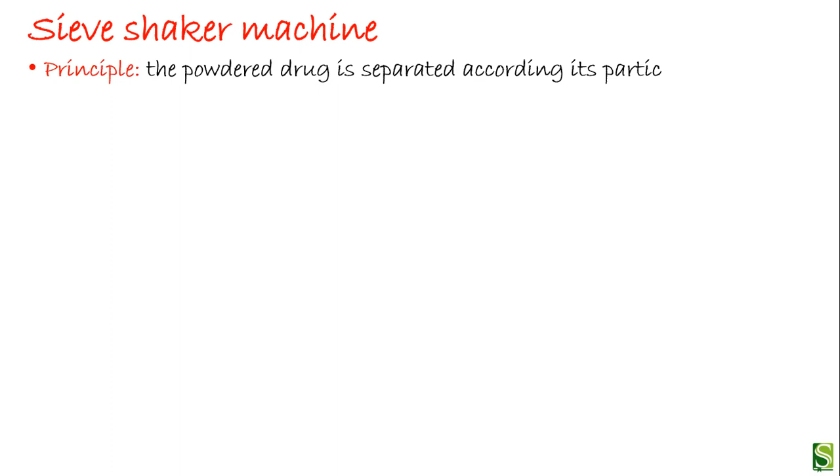Now, first, let's see what is a sieve shaker machine. The sieve shaker works basically on the principle of size separation based on the size of the particle. So we can say the powdered drug is separated according to its particle size using a number of sieves in a nest, which are then agitated for a rapid size separation.

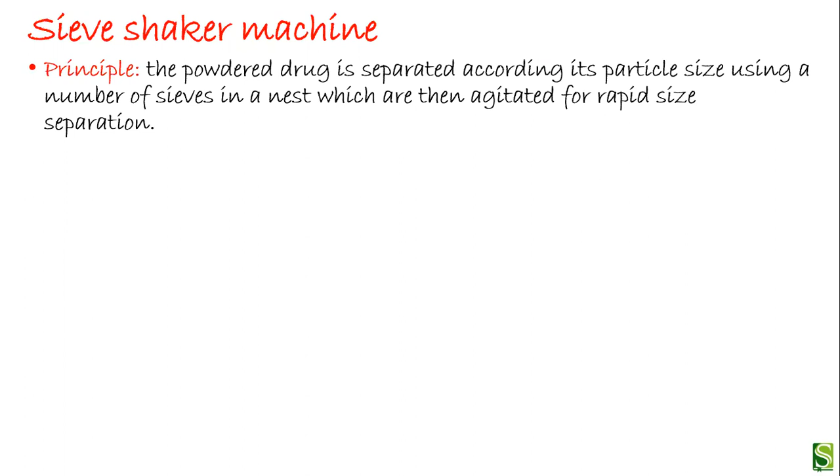Let us see the construction. Standard sieves of different mesh numbers are fixed in a mechanical shaker apparatus with the coarsest sieve at the top and the finest sieve at the bottom. First we will see the working, then we will see its diagram. The powder sample of 50 gram is placed on the top sieve, that is on the coarsest sieve.

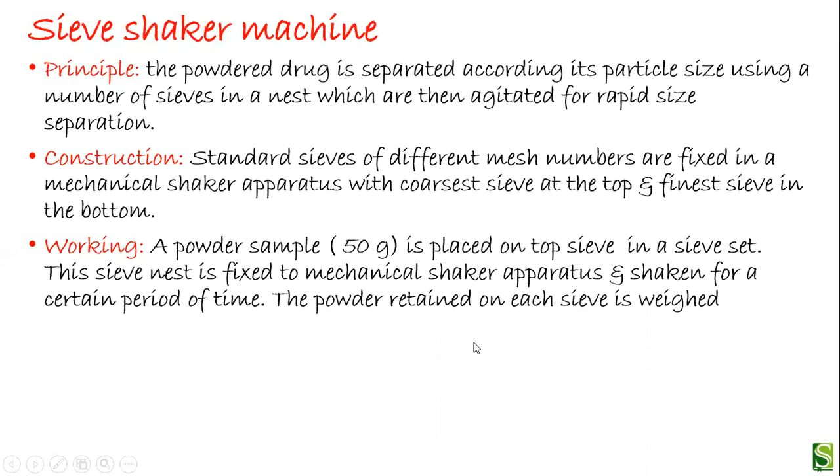So this sieve nest is then fixed to a mechanical shaker apparatus and shaken for a certain period of time, and the powder retained on each sieve is then weighed after the equipment has stopped shaking. Okay, so now this is a sieve shaker. This is the lid of the sieve shaker. These are the sieves of different sizes.

Now what we have to keep in mind: the coarsest sieve means the sieve which has the least sieve number. That is kept here on the top, and the sieve which has the highest sieve number is kept below. So a small sieve number represents coarseness, and a large sieve number expresses fineness.

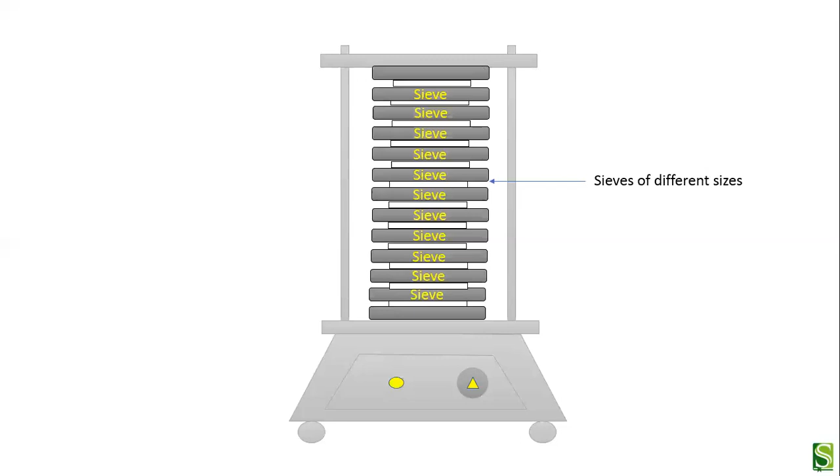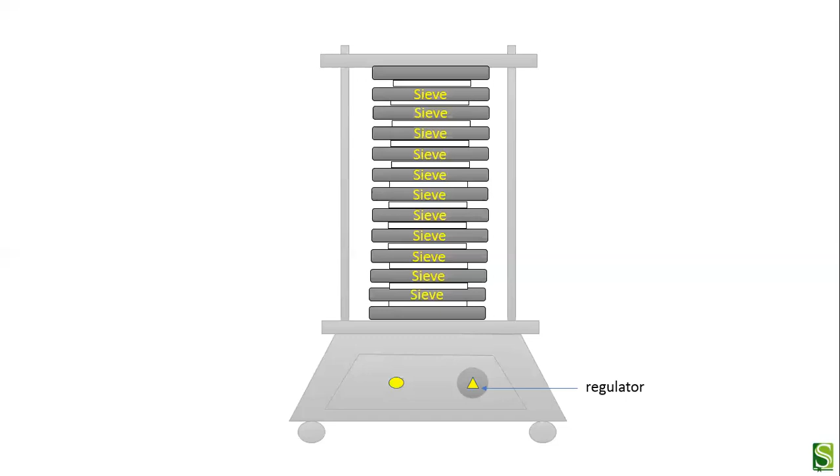Suppose we have placed sieve number 10 here, then we will place sieve number 12, and then sieve number 22, 44, 60, 80, 85, 100, 125. In this way we have to arrange these sieves. This is the receiving pan, this is the indicator bulb, and this is the regulator. You can fix the time for which you want to shake the equipment.

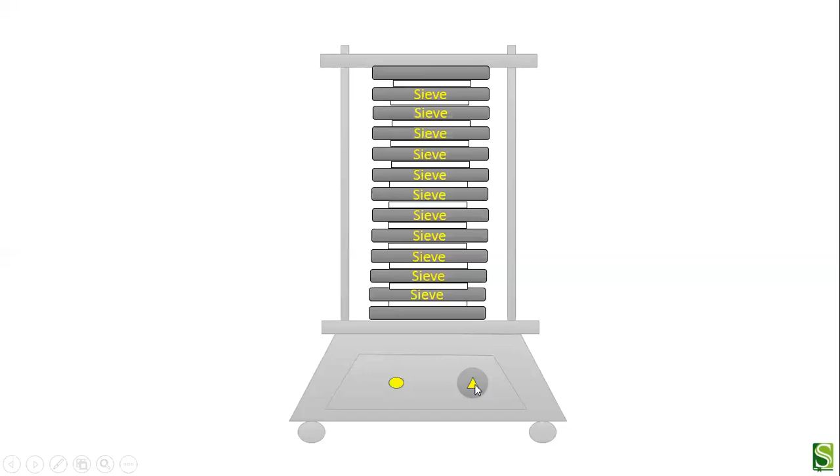Now what happens when you switch it on? First you will arrange this assembly, then you are going to pour 50 grams of the powder on the top sieve, and then you will place this lid. You will fix this lid, set the time period here, and start the equipment. Now this machine will start to agitate,

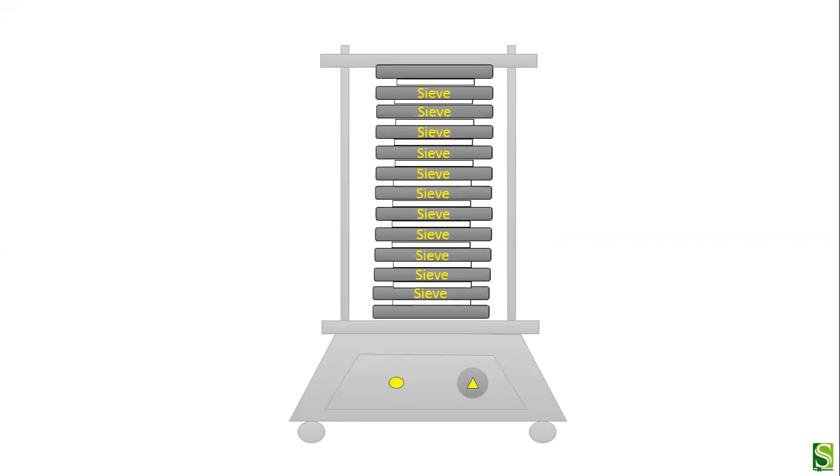or we can say it will start to shake. After the time is over, it will stop, and then we will take out this lid, and one by one we will take out the sieves. After taking out the sieves, we will weigh how much of the material is retained on each sieve, and then we calculate the percent of the weight retained. In this way we get the size distribution.

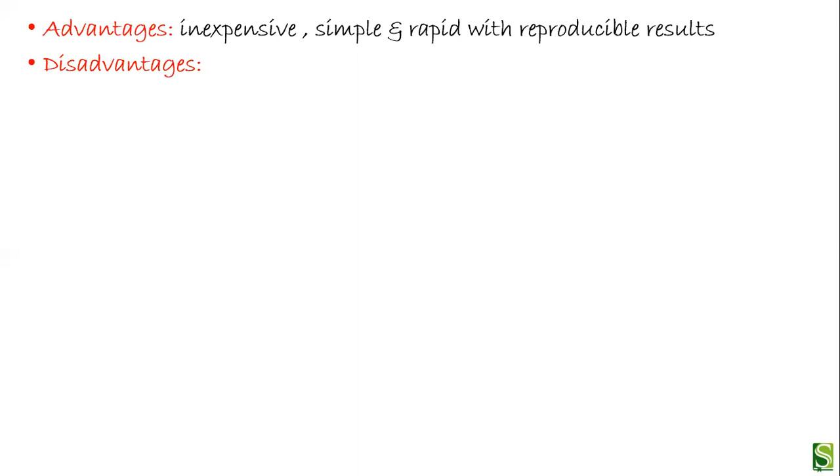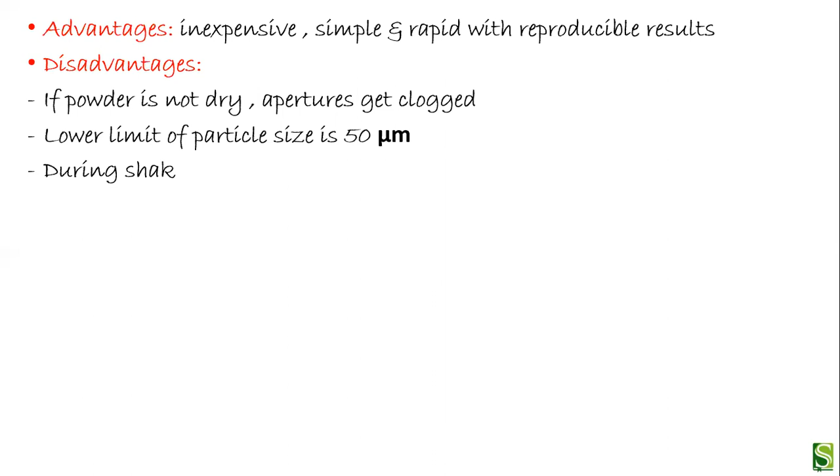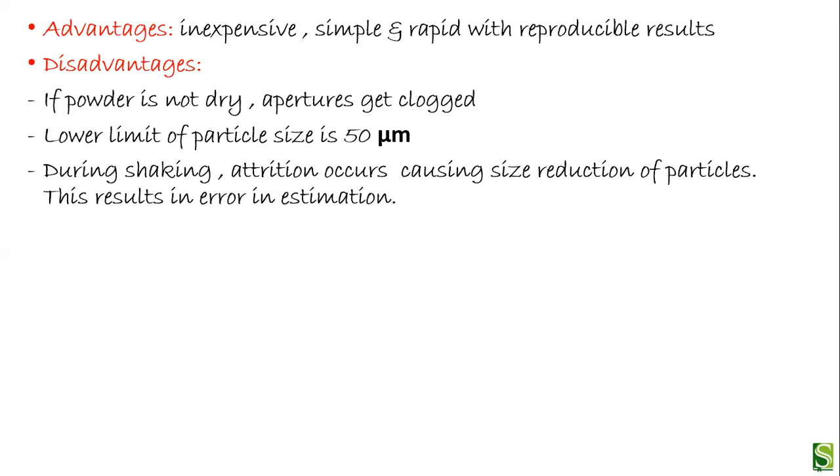The advantage of this equipment is that it is very inexpensive, simple, and rapid with reproducible results. The disadvantage is that if the powder is not dry, the apertures get clogged. It has a lower particle size limit of 50 micrometers. Also, during shaking, attrition occurs, which results in size reduction of the particles, and this results in errors in the estimation. The variant of the sieve shaker is the electromagnetic sieve shaker.

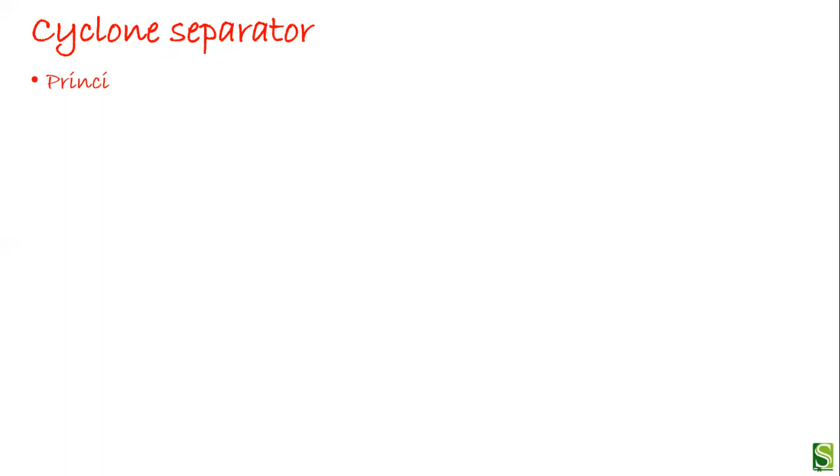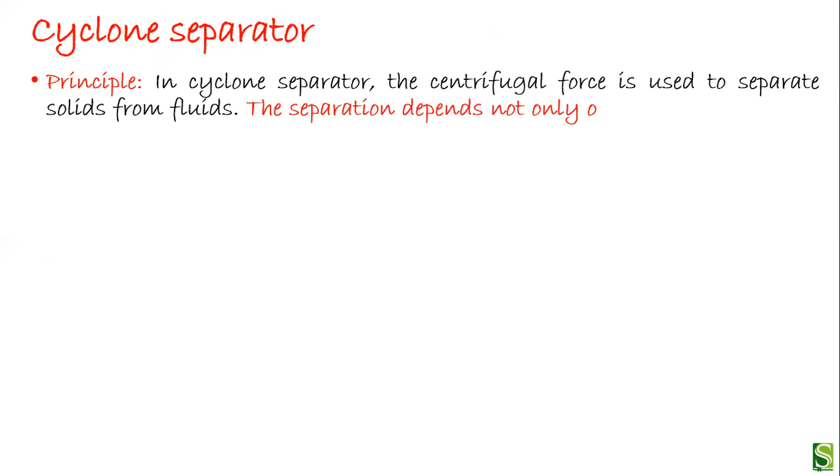Now next we are going to see the cyclone separator. The principle is that in a cyclone separator, centrifugal force is used to separate the solids from the fluids. The separation depends not only on the particle size, but also on the density of the particle. The higher the density, the more its settling rate.

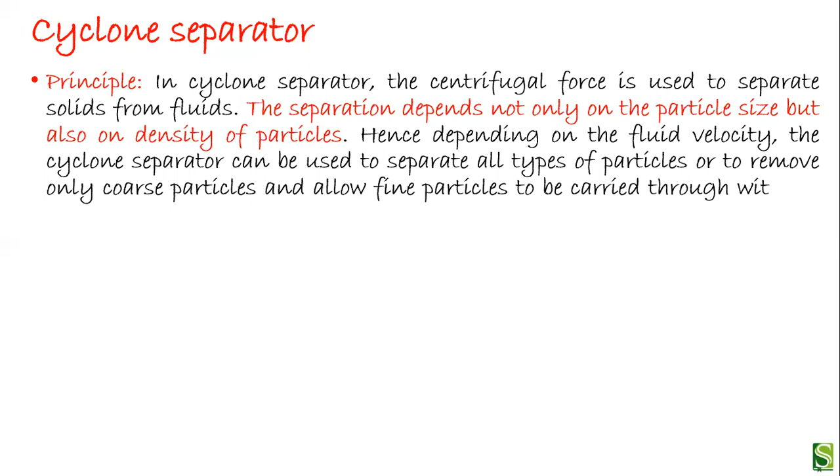Depending on the fluid velocity, the cyclone separator can be used to separate all types of particles, or to remove only coarse particles and allow fine particles to be carried through the equipment with the fluid. Basically the cyclone separator consists of a cylindrical vessel with a conical base at its lower part.

The upper part of the vessel is fitted with a tangential inlet and a fluid outlet. The fluid outlet is on the upper side. Now which fluid are we going to use? We are going to use a gas. This extends inwardly into the separator, and at the base it is fitted with a solid outlet.

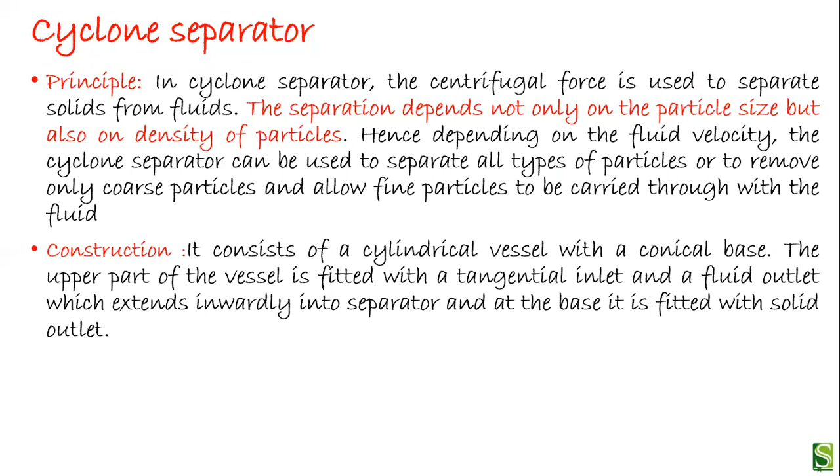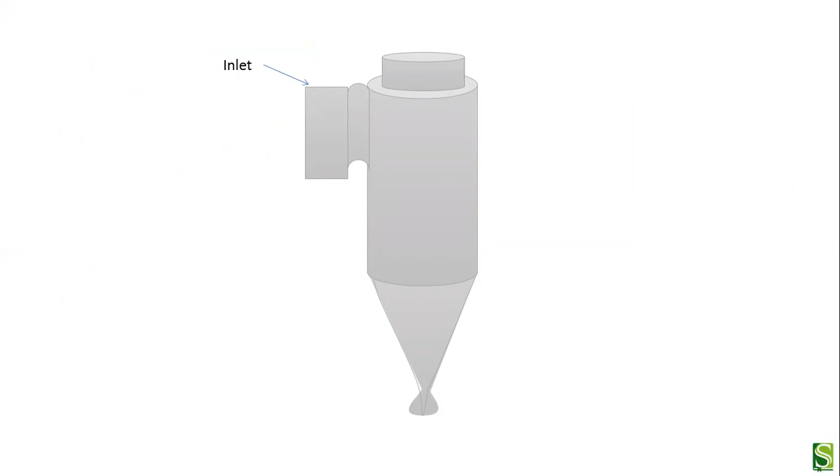Now this is the actual construction of the cyclone separator. This is the inlet. Inlet for what? Inlet for gas along with the powder particles. So it has got a tangential inlet. After that inlet, this is the gas outlet tube.

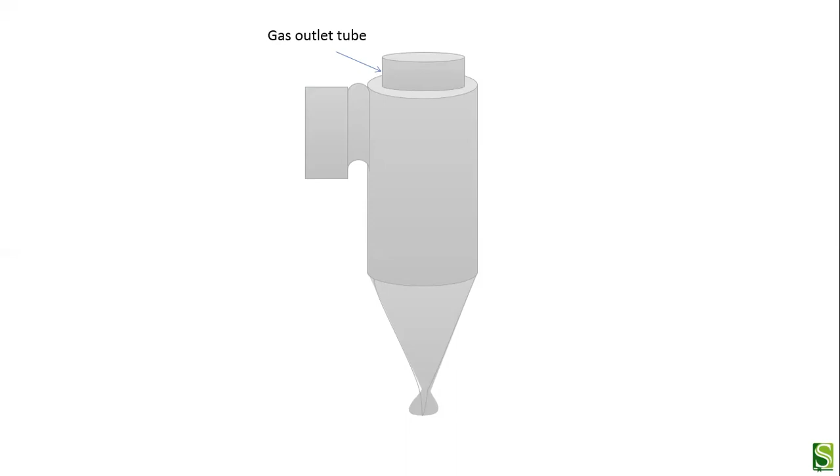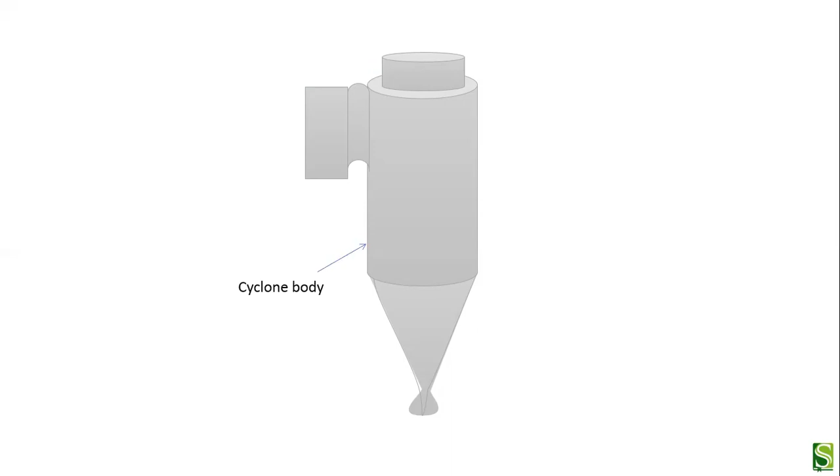The gas comes out through this outlet, or the gas along with very fine particles comes out. Okay, then this is the outlet for clean air. Then this is for dirty air, and this is the cyclone body, and this is the conical section of the body, and this is the outlet.

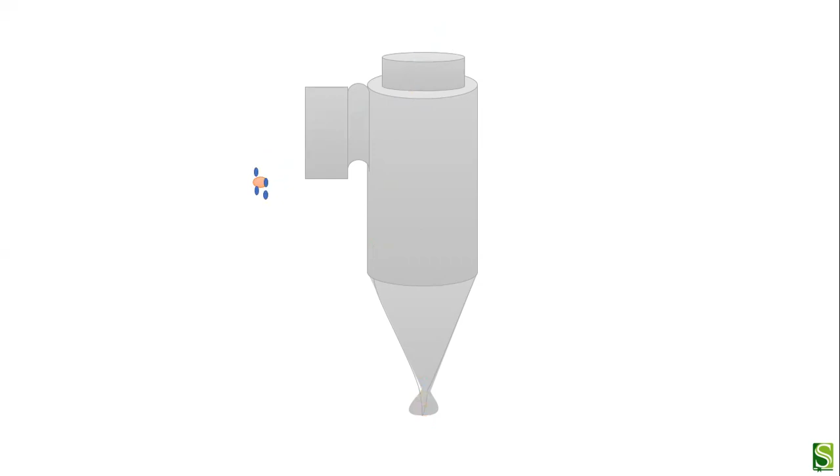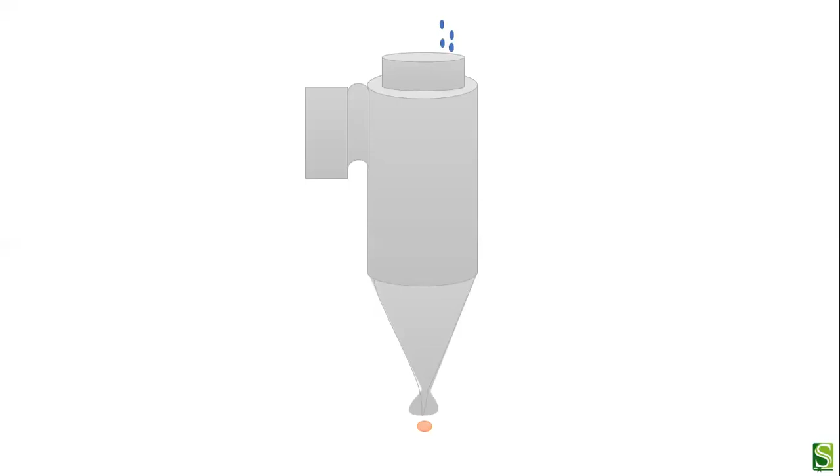Okay, so when you feed the cyclone separator with a very high velocity of gas which contains the powders, when it moves inside, what happens? The fine powders can be carried with the fluid, but the coarse particles experience centrifugal force, and due to centrifugal force, they move over a circular path, and then come out through the outlet. So in this way we have achieved the separation of fine and coarse particles.

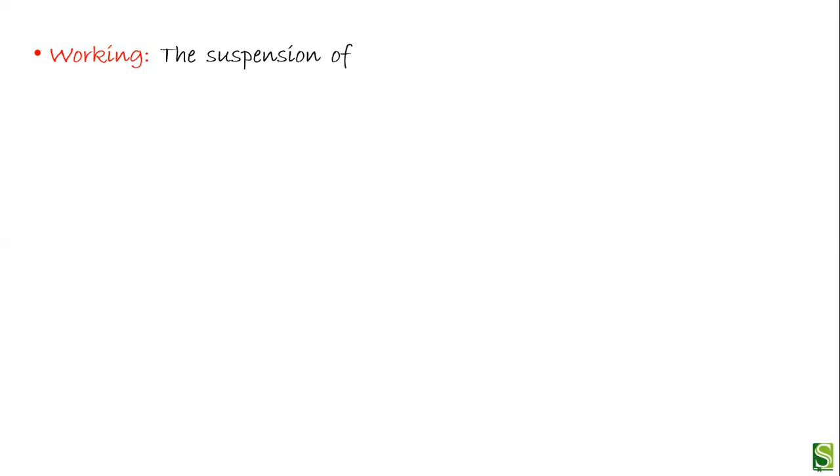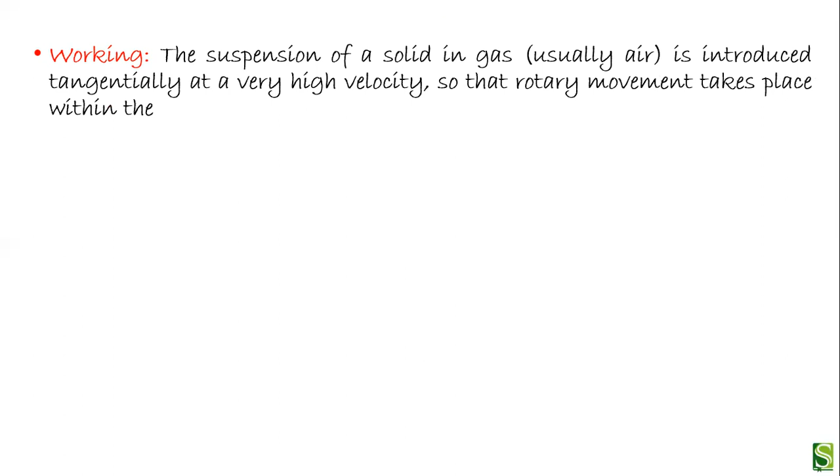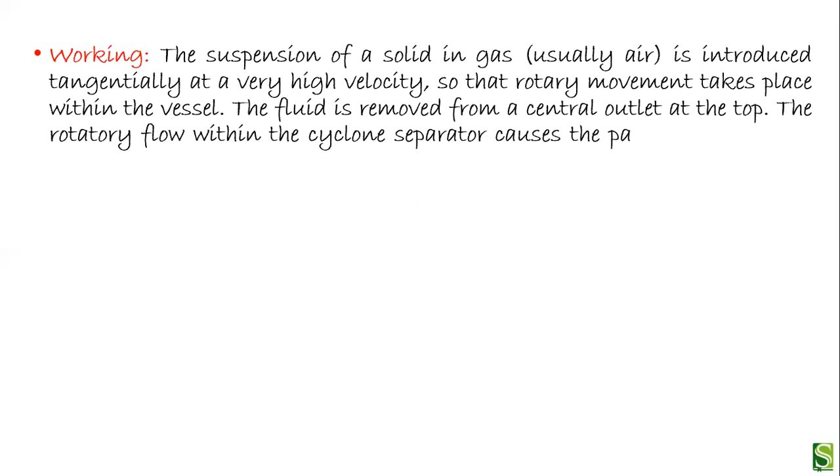So the working can be described as: when you introduce the solid in the gas tangentially at a very high velocity, the particle gets rotary movement within the vessel, and the fluid is removed from the central outlet provided at the top, and the rotary flow within the cyclone separator causes the particles to be acted on by the centrifugal force. Due to the action of the centrifugal force, the solids are thrown out to the walls, and thereafter fall to the conical base, and then are discharged through the solid outlet.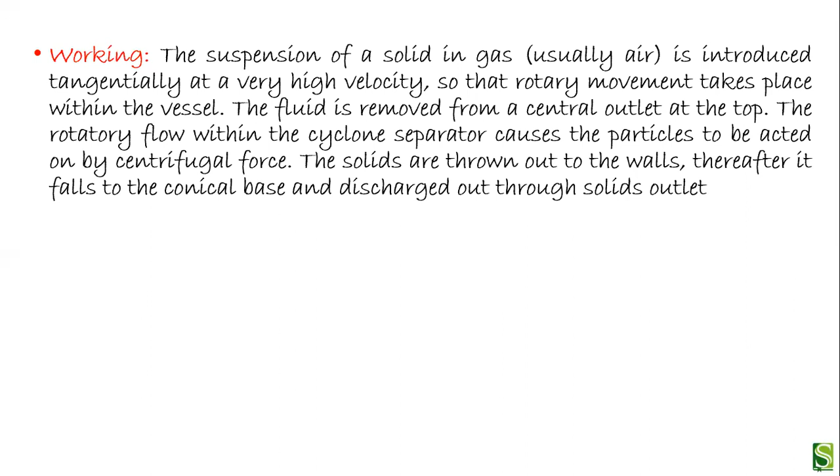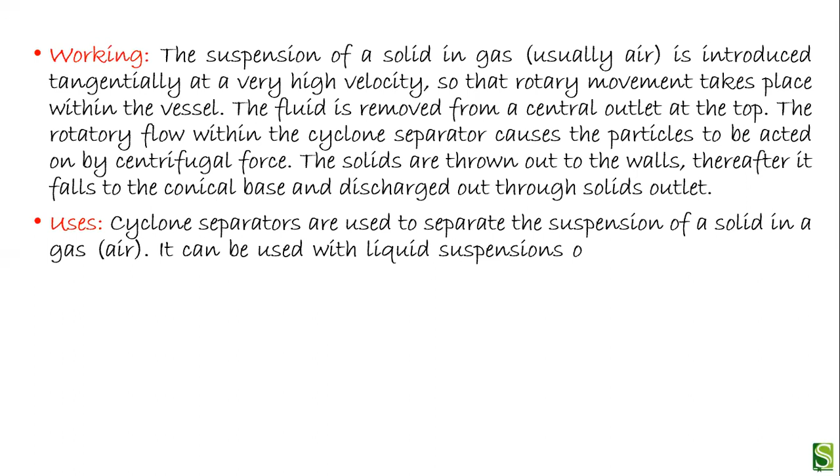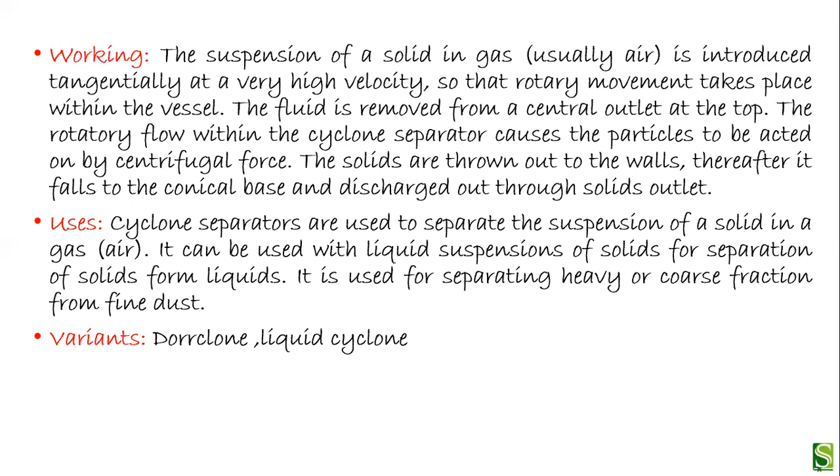Now cyclone separators are mostly used for separation of suspension of a solid in a gas or air. It can be used with liquid suspensions of solids for separation of the solids from liquids. It is also used for separating heavy or coarse fraction from fine dust. The variants of cyclone separator include Dorrclone and liquid cyclone.

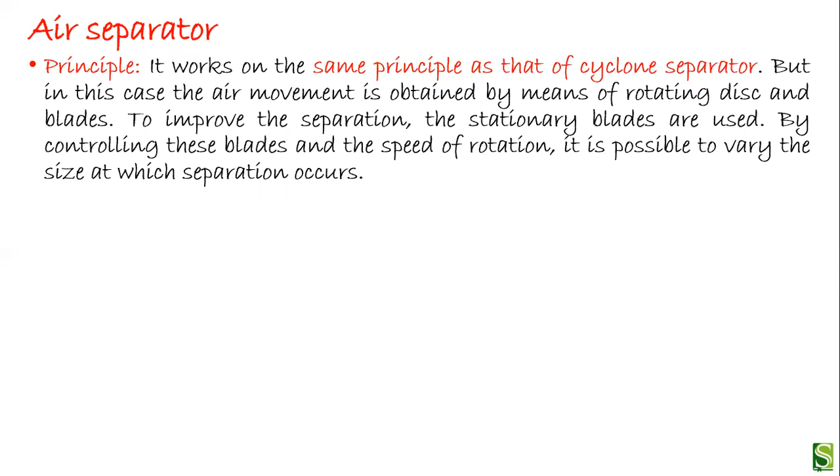Now we will see air separator. It works on the same principle as the cyclone separator, but in this case, the air movement is obtained by means of rotating disc and blades. To improve the separation, stationary blades are used. So by controlling these blades and the speed of rotation, it is possible to vary the size at which separation will occur.

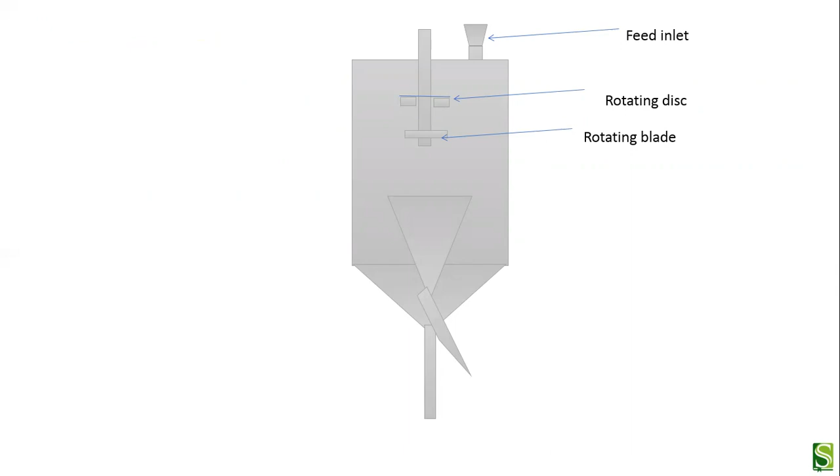Now this is your air separator. This is the feed inlet. This is the rotating disc. This is the rotating blade. Sometimes this blade can be made stationary. So depending on the rotation of the blade, or if it is stationary, we can achieve separation of different sizes. This is the outlet for heavy particles. This is the outlet for fine particles.

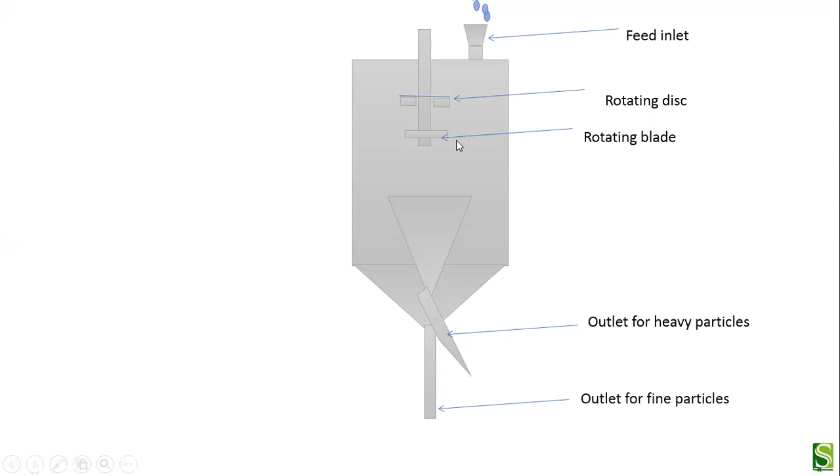Now when you feed this air separator with the particles, what happens? Due to the rotation of the disc, high air currents are produced within this equipment, and the heavy particles do not move along with that current of air, and hence they immediately settle and are taken out from this outlet. Whereas the fine particles get moved along with the air current generated by rotation of this disc and blade, and hence they move towards the wall of the container, then slowly fall down, and are collected from the outlet for fine particles. So this is the working of air separator.

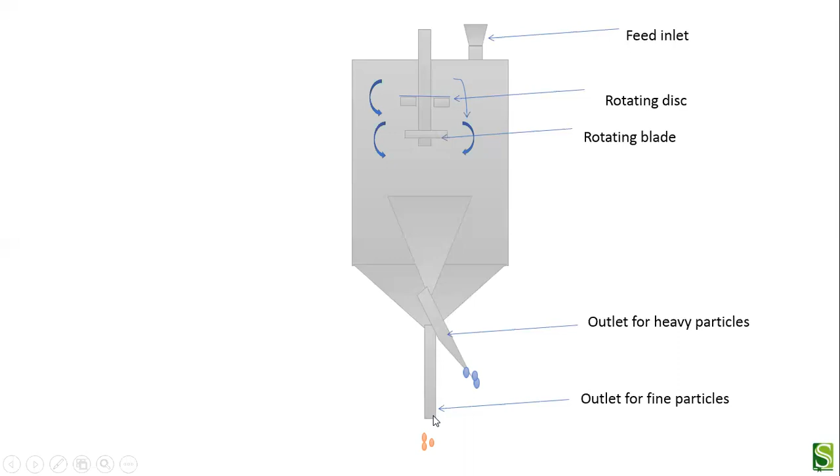Now let us see, when the particles move inside, the blades are always rotating, producing a current of air. When the heavy particles come across this air, their path of fall is not deflected by the air, and hence they fall through this outlet for heavy materials. Whereas the fine particles get carried away with the current of air, and hence come out from this outlet for fine particles.

So we can say the construction is very easy. It has a conical base, and in the upper part of the separator, the vessel is fitted with the feed inlet, and at the base there are two outlets: one for fine particles, and the other for heavy particles. The rotating disc and the rotating blades are attached to the central shaft to produce air movement.

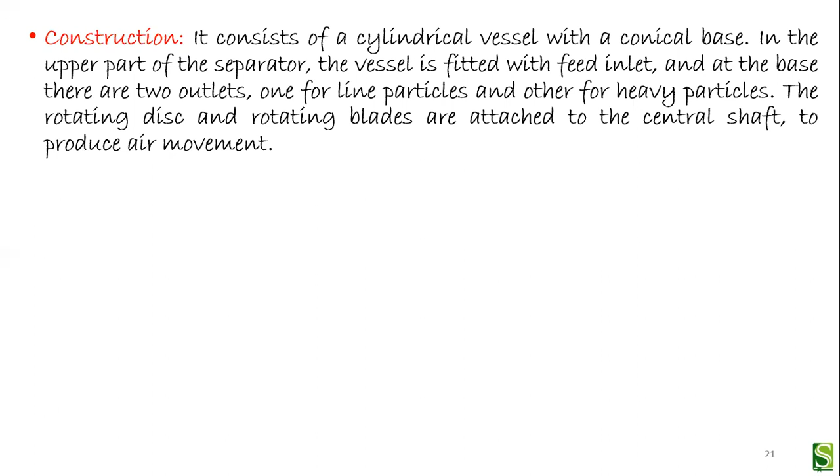The working, as shown in the figure: the sample powder is passed through the feed inlet and falls on the rotating disc. The rotating blades are attached to the same shaft. This produces a current of air, as shown by the arrows. The fine particles are picked up and carried into the space where air velocity is sufficiently reduced. Then the fine particles drop and are ultimately collected at the outlet meant for fine particles.

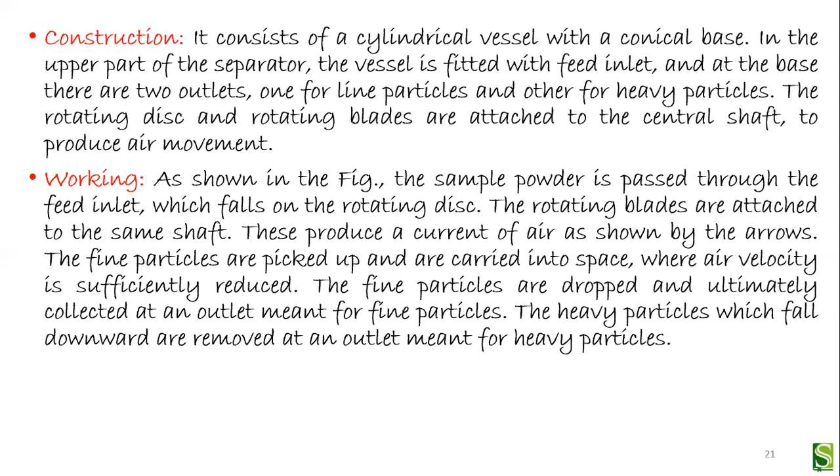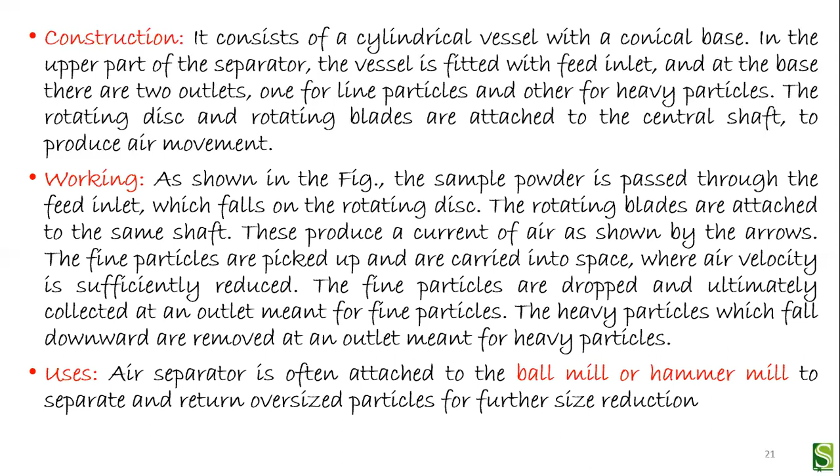The heavy particles fall downwards because of their high density, and they are removed from an outlet which is meant for heavy particles. The use of an air separator is that many times it is attached to a ball mill or hammer mill to separate and return oversized particles for further size reduction. So this was all about the air separator.

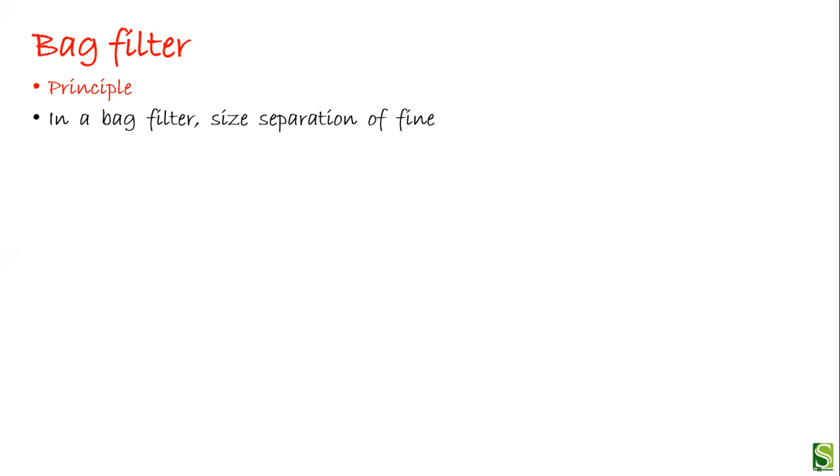Now we will see what bag filters are. In a bag filter, the size separation of fines or dust from the milled powder is achieved in two steps. In the first step, the milled powder is passed through a bag made from cloth by applying suction on the opposite side of the feed entry, and this facilitates the separation. In the next step, pressure is applied to shake the bags so that the powder adhering to the bag falls off, which is collected from the conical base.

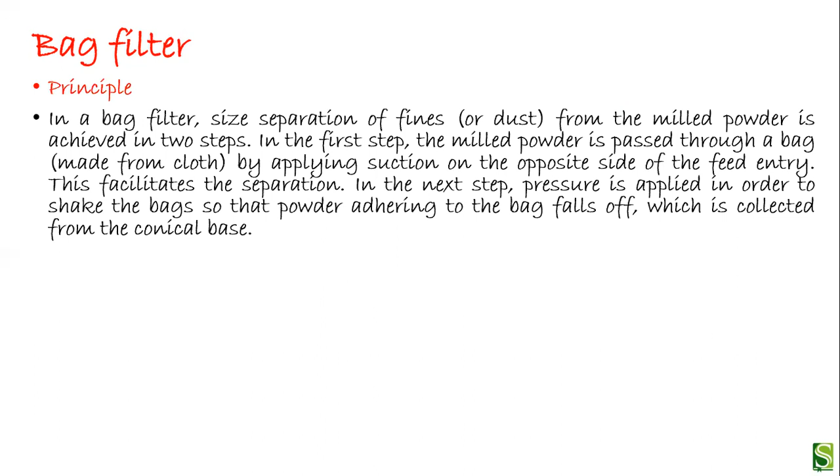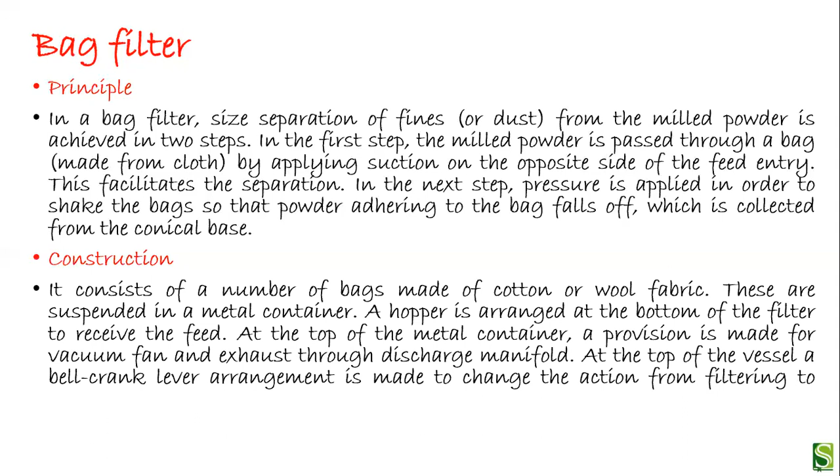The construction: it consists of a number of bags made of cotton or wool fabric, suspended in a metal container. A hopper is arranged at the bottom of the filter to receive the feed. At the top of the metal container, a provision is made for a vacuum fan and exhaust through a discharge manifold. At the top of the vessel, a bell crank lever arrangement is made to change the action from filtering to shaking. So this is a bag filter.

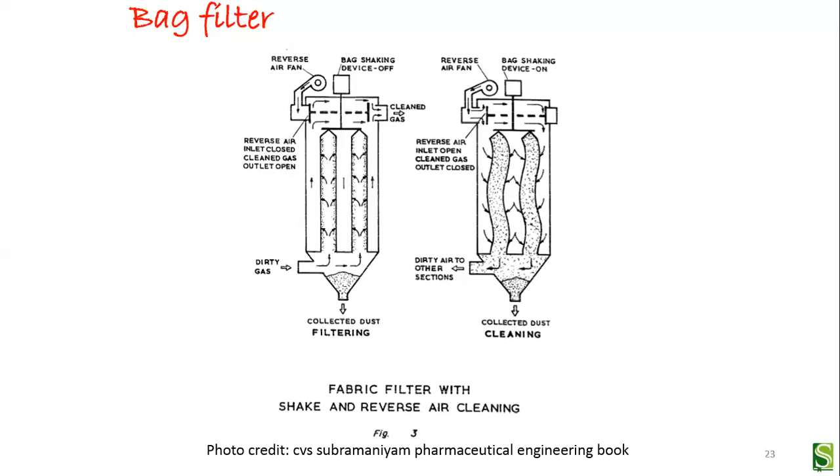The working is divided into two periods: the filtering period and the shaking period. During the filtering period, the vacuum fan produces a pressure lower than atmospheric pressure within the vessel. Gas to be filtered enters through the hopper, passes through the bags and out of the top of the apparatus. The particles are retained within the bags.

Then comes the shaking period. During this period, the bell crank lever first closes the discharge manifold, and air enters through the top, so the vacuum is broken. At the same time, it gives a violent jerking action to the bags so that they are freed from the dust, and the fines are collected from the base.

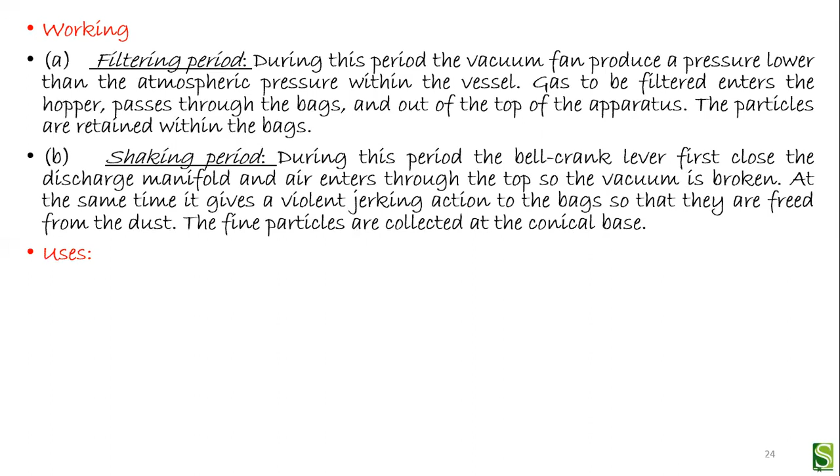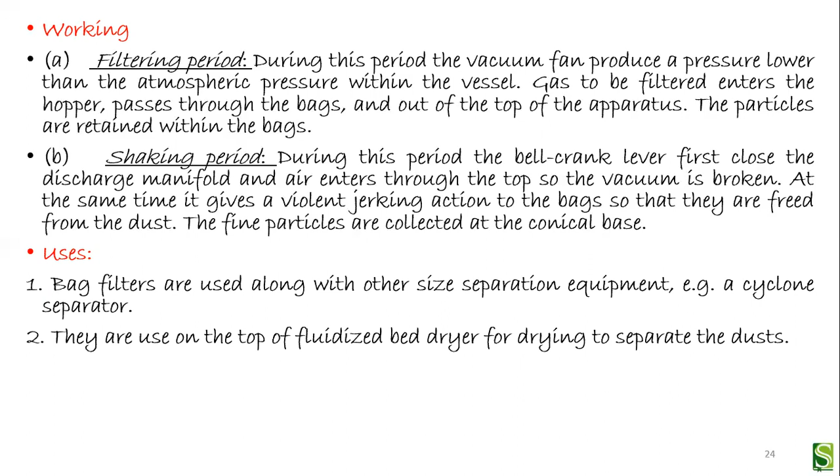The bag filter can be used along with other size separation equipment like the cyclone separator. They are used on top of fluidized bed dryers to separate the dust. They are used to clean the air of a room. Also, household vacuum cleaners are a simple version of the bag filter. So this was all about the bag filter.

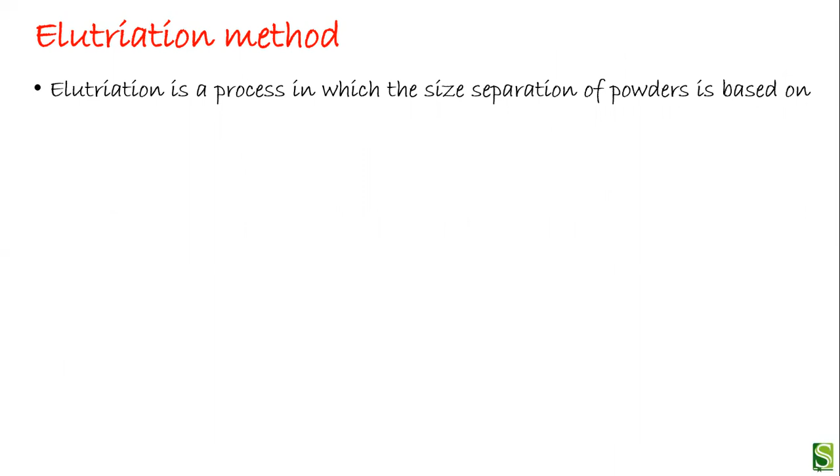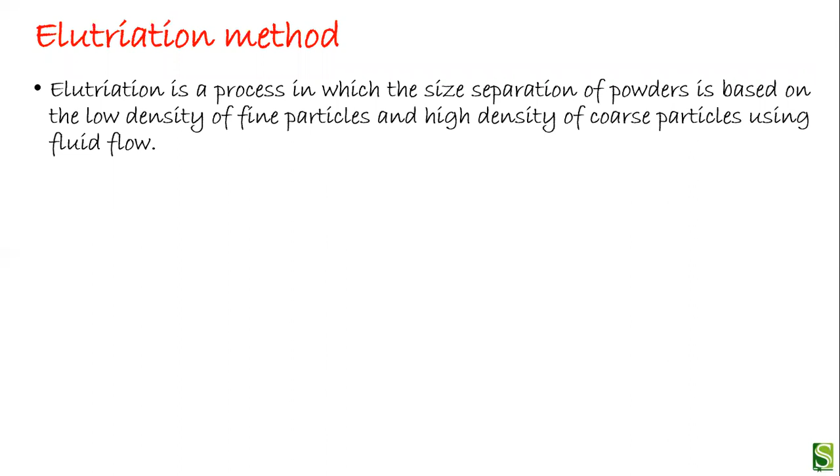Now we will see the elutriation method. Elutriation is a process in which the size separation of powders is based on the low density of fine particles and high density of coarse particles using fluid flow. The principle is that in elutriation, the fluid moves in the direction opposite to the direction of sedimentation, meaning we make the fluid move opposite to the force of gravity. The separation depends on the velocity of the liquid or air and the size and density of the particles present in the mixture.

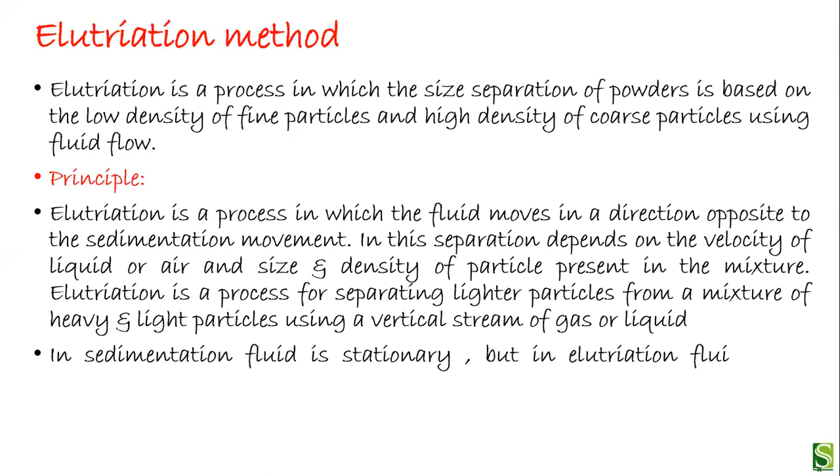So elutriation is a process for separating lighter particles from a mixture of heavy and light particles using a vertical stream of gas or liquid. In sedimentation, the fluid is stationary, but in elutriation, the fluid is in motion. So this is the basic difference.

Now first we are going to see what an elutriation tank is. The elutriating tank is used to separate the coarse and fine particles of powder after levigating. First, the dry powder or its paste is kept in the elutriation tank and mixed with a large quantity of water. The solids get uniformly distributed in the liquid by stirring, and then it is allowed to settle. Depending on the density of the solid particles, they will either settle or remain suspended.

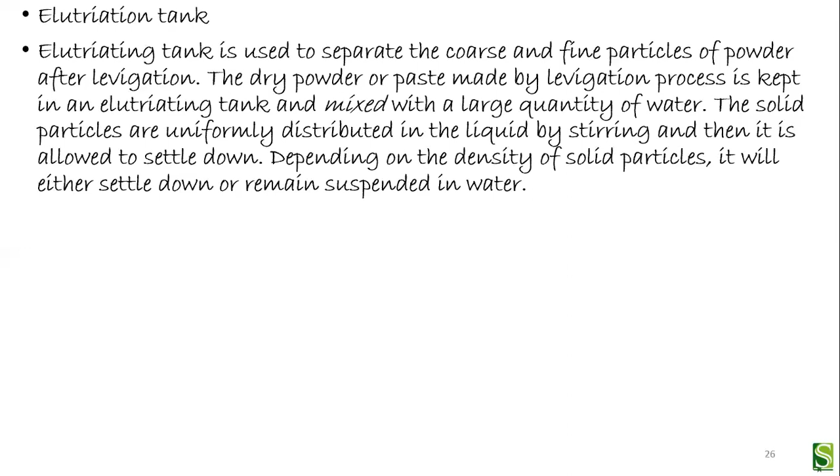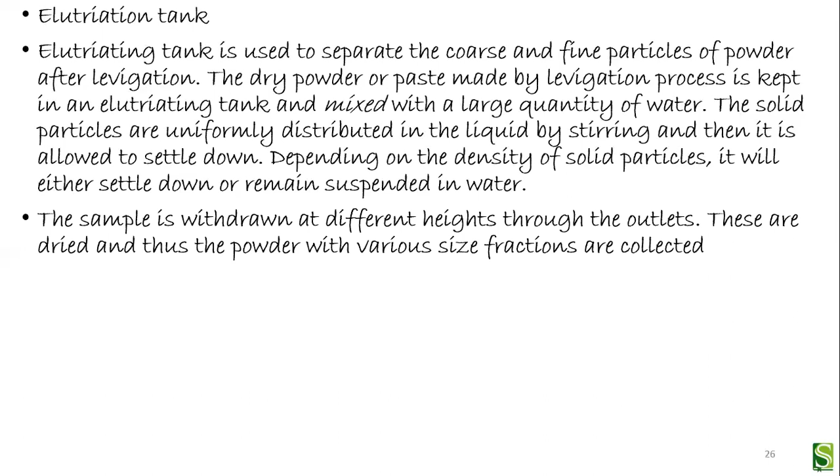Now when the particle has got low density, it will remain floating, and when the particle has got high density, it will immediately settle, because we are not going to add any suspending agent; it is just a mixture of powder and water. So the heavy particles will immediately come down, and the finer particles will still be dispersed in the water. So what we do in this case is we remove the sample at different heights from the outlets, and these are then dried, and the powder with various size fractions is collected.

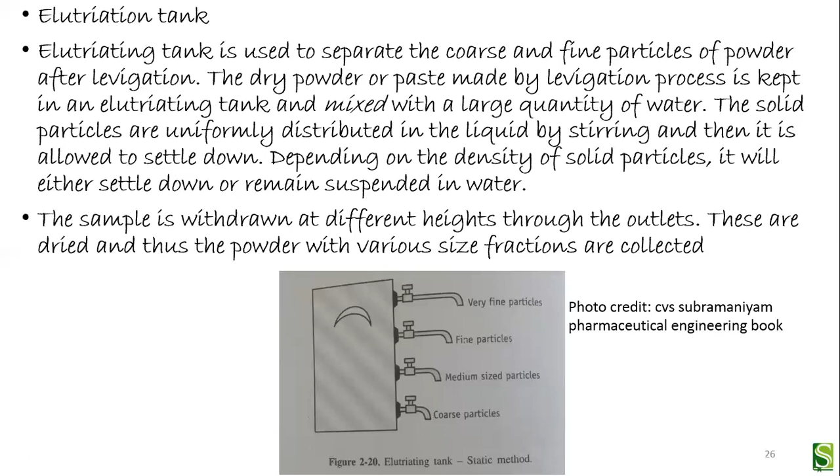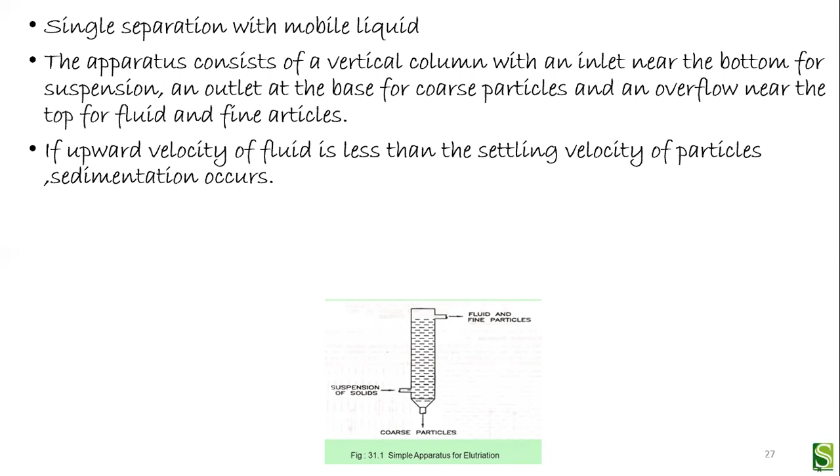The next elutriation method is single separation with the mobile liquid. The apparatus consists of a vertical column with an inlet near the bottom for the suspension; you can see the suspension enters from here. An outlet at the base is provided for the coarse particles, and an overflow near the top for the fluid and the fine particles. If the upward velocity of the fluid is less than the settling velocity of the particles, it will result in sedimentation, and the heavy particles settle and can be removed from this outlet. If the upward velocity is greater than the settling velocity, elutriation takes place.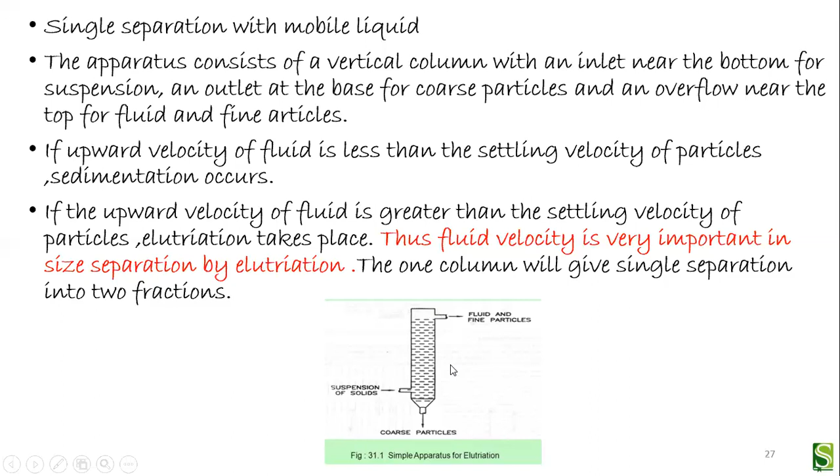Thus the fluid velocity is very important in separation by elutriation. One column will give you a single separation. You can observe that separation occurs only once, so we get two fractions: one of coarse particles and one of fine particles. So when you get separation once, you get two fractions.

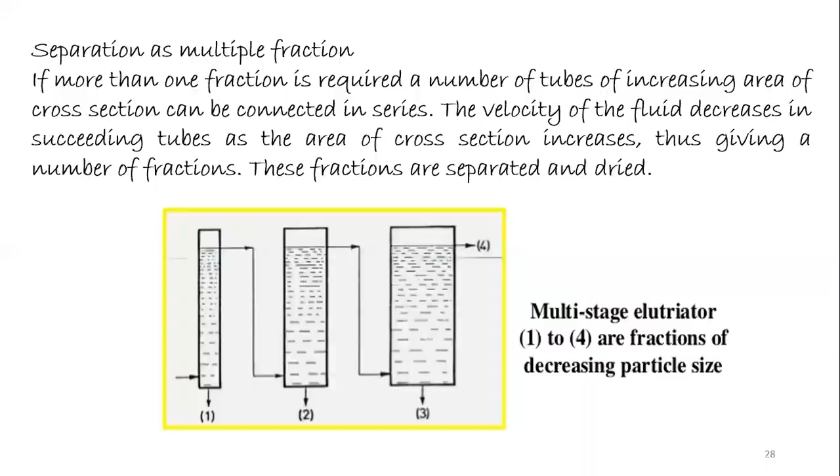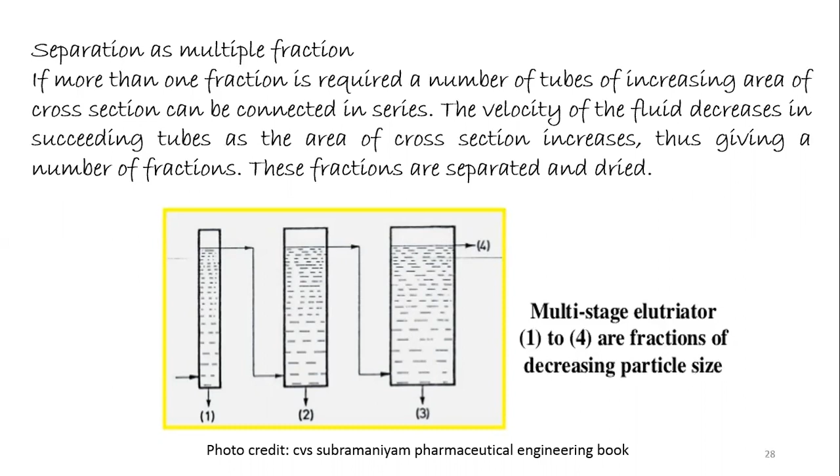If you want to separate more than one fraction, you have to take a number of tubes of increasing area of cross section connected in series. The velocity of the fluid decreases in succeeding tubes as the area of cross section increases, thus giving a number of fractions, which are separated and dried later on. So this was all about the elutriation method.

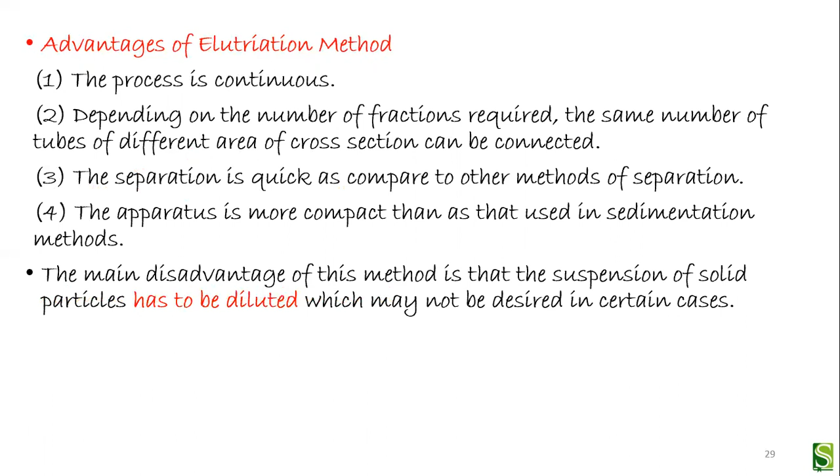What is the advantage of this method? The process is continuous. Depending on the number of fractions required, the same number of tubes of different cross-sectional area can be connected. The separation is quick compared to other methods, and the apparatus is more compact than that used in the sedimentation method. The main disadvantage is that the suspension of solid particles has to be very dilute; only then can we get separation, otherwise it is not possible. So this was all about the separating equipment used in the pharmaceutical industry.